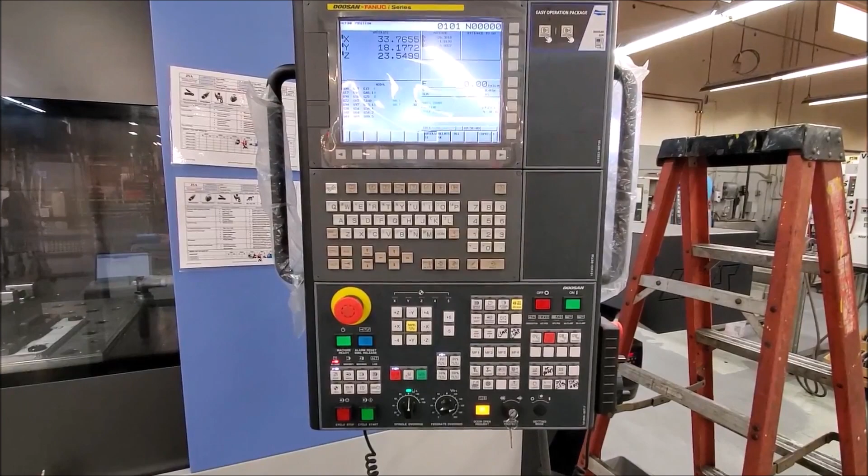We'll just get into the details here. The first thing we want to do is figure out what the addresses are for these buttons and these lights, because we want to know what they're doing at all times. The way we're going to do that is by looking in the manual.

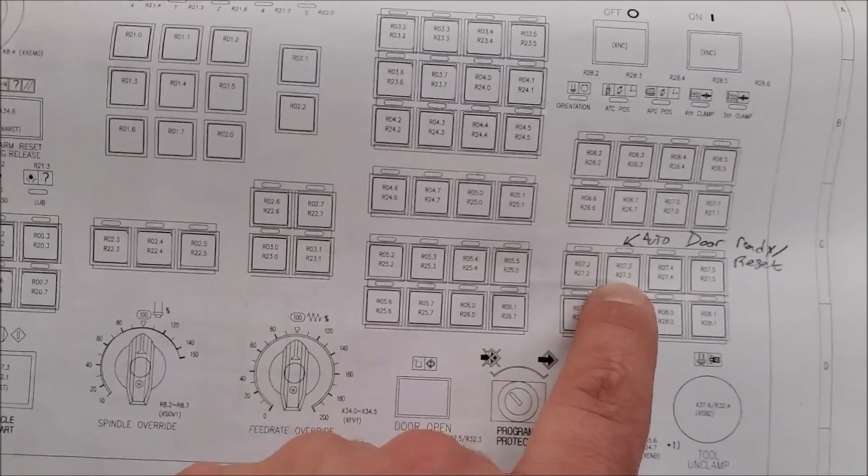What we're going to do is kind of trick the PMC into ignoring what they used to do and then giving them new functionality. And then these two, I believe, are blank, so these are going to be the clamp and unclamp, auto door reset, close and open door. In other machines we've also used this one, which was mapped to something else, but we took that map away and just dealt with it that way.

So in a moment I will show you how to do that.

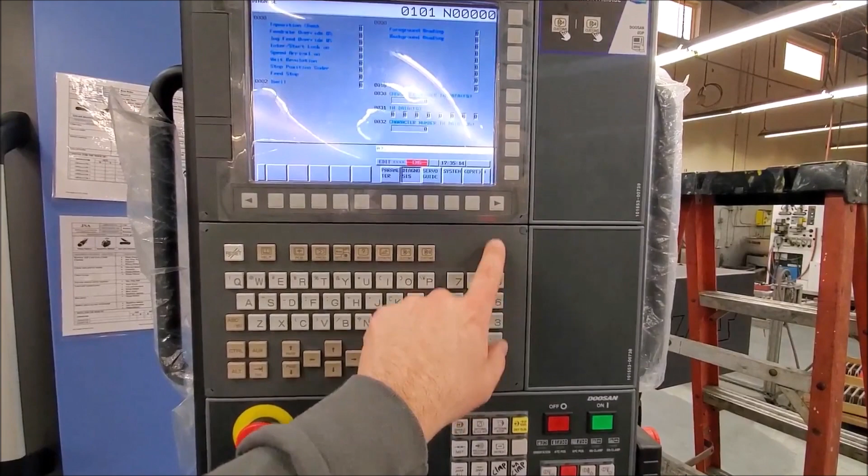The way that you program this is you have to enable the PLC or PMC editing. You start with e-stop, make sure you're still on edit. I'm not sure that matters, but that's what I do. Then you hit system, and I'm gonna go until it says something else. Then you find where it says PMC config. I'm gonna get real close to this so you can see it.

Then you come to this screen and you have to arrow down and then right key over, and you turn this to edit enable. Yes. You come down here and you say programmer enable. Yes. And this kicks the PMC into an editable mode.

Then you can hit system again, hit over a few times, then you go into the ladder. The first thing we're going to do is pick the address for one of these and see if it's being used. I'll show you how to do that.

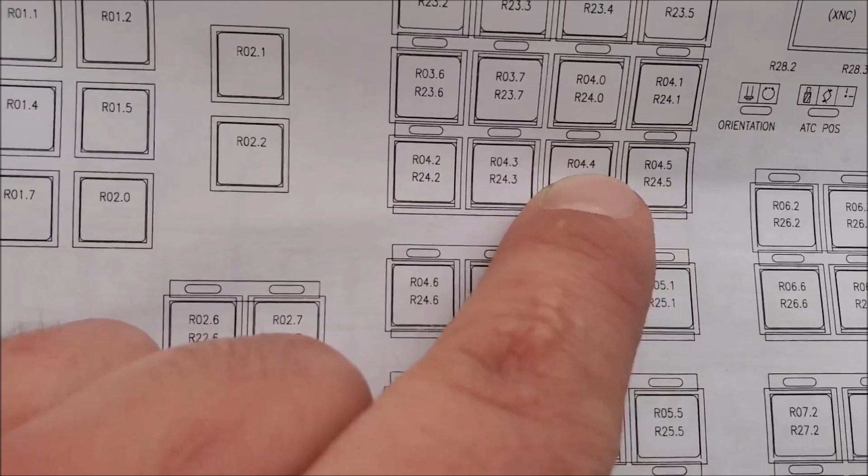R4.4 is the actual switch, R24 is the light. We could be wrong, we'll find out in a moment. But I'm going to look for R4.4.

Alright, so we need to get back to the ladder, so you hit system and over key until you see this PMC ladder. Then we need to search for R4.4, so hit there, and then I hit search menu. We're going to do this a handful of times. Say R4.4, search, and voila, it's right there.

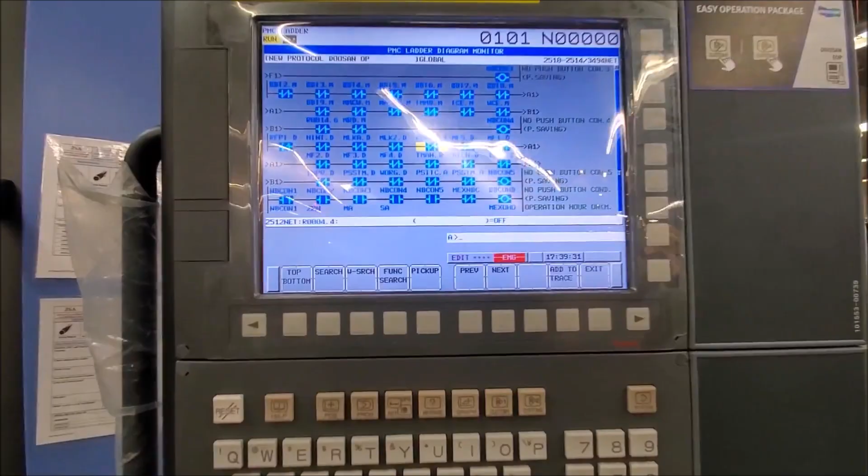So if you hit this button, you'll see that bit turn on and off. So normally you would never hit this button, so what we're going to do is just remove it completely. It's not even addressed, like it doesn't have a name, no one cares about it.

So the way I'm going to do that is I'm going to say exit, so we're going to exit out of this search function. Then I'm going to say edit, and then that's a problem.

So we have a problem. It's asking for a password to be able to write into the PMC, so we can't edit it. We need to get the password.

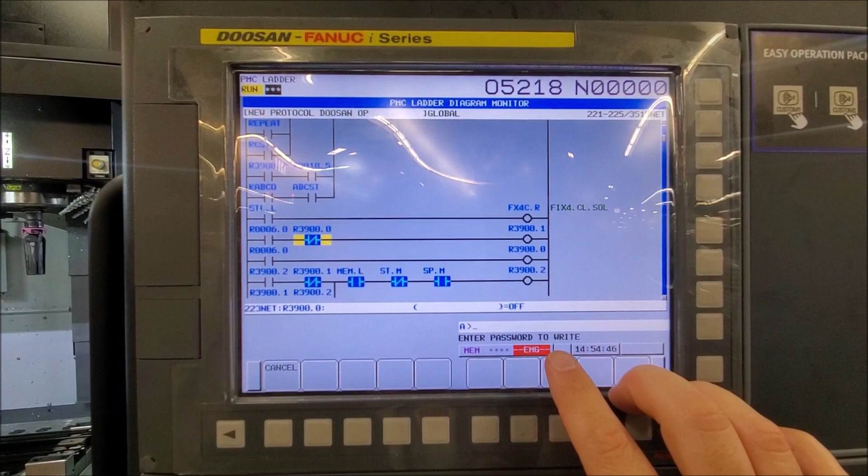There's two ways to do that. You can ask your distributor for the password, and if they're really awesome, they'll give it to you. Sometimes they won't, but most of the time I would guess that they will. Now, obviously, for obvious reasons, it may be protected for your own good. If you go in and screw the ladder up, then you could break your mill, or it could malfunction in some way that's dangerous, which neither of those things are good. But this video will help you understand what can be changed, and hopefully give you a little piece of good judgment about how to do it.

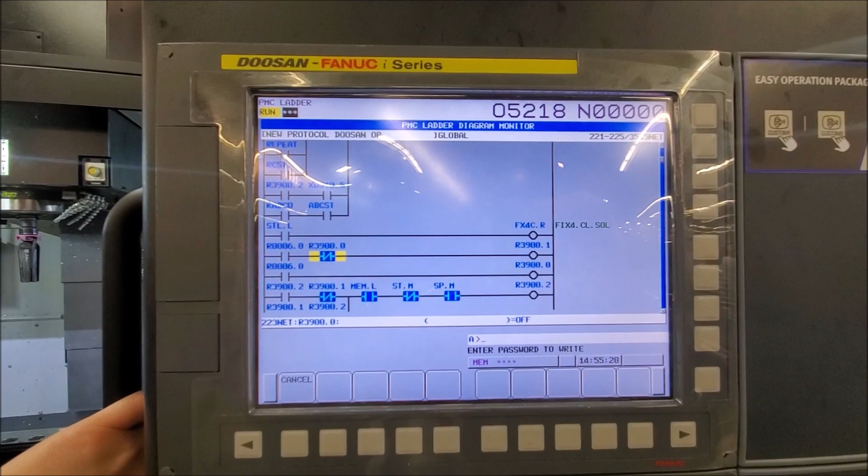The second way to crack the password is to use Google. I Googled something like Fanuc PMC password help, and it brought me to a variety of forums. In those forums there were guys that offered their email addresses and said, hey, if you need a password, just send me the ladder and I'll send it to you. That's what I did, and I got the password, big shout out to those guys for doing that for me. I also asked my dealer, and he gave it to me as well. So both ways worked, but either way should work for you guys. There's lots of good folks out there that help me out.

Anyway, the password for this machine is 1976. You go in there, and then you have the ability to edit. So now we move on to our next step.

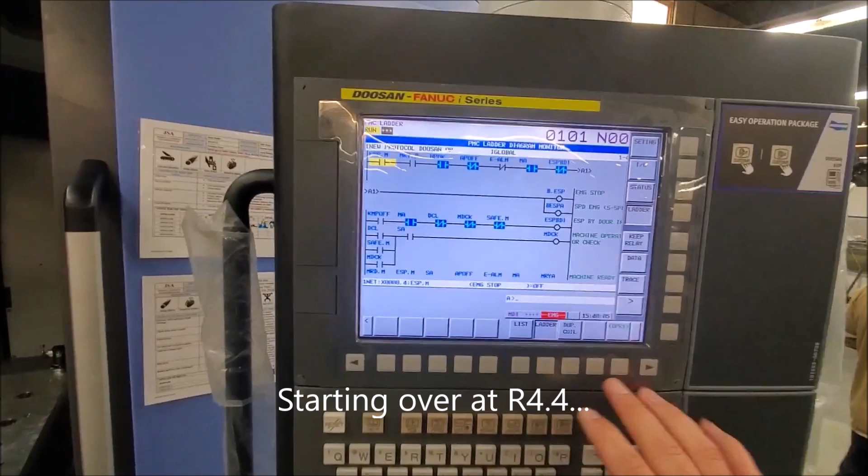Now we're going to search by hitting operator, search menu. We're going to say R4.4, and we're searching, and it found it here. So I'm gonna make this go away. This is a power savings conditional button. So if I press this clamp button right here, you'll see that bit toggle.

In a normal day, that really doesn't do anything for anyone ever. So what we're gonna do is just delete that from that bit of ladder. The way you do that is you're gonna exit, search, edit the ladder. It's asking for a password. The password for ours is 1976. Weirdly, this is the first mill that we've had that has a password.

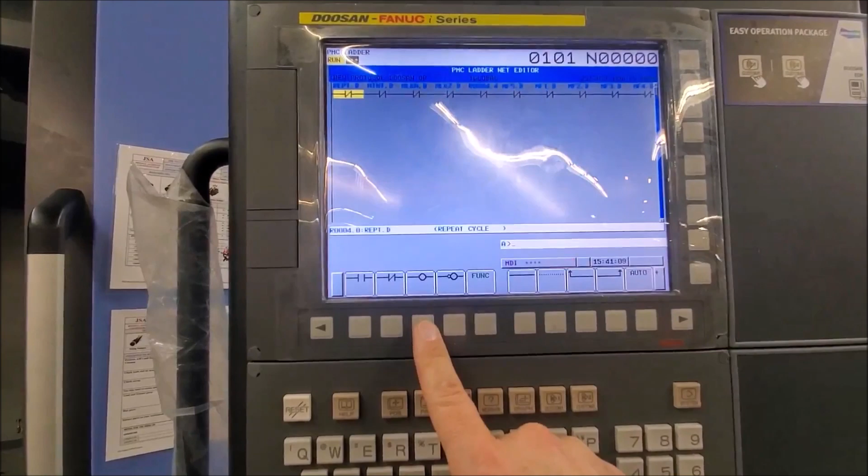Now we go to zoom, so we're going to zoom into this particular rung. And we go to R4.4, and we're just going to add a straight line, which is effectively a delete. So you just hit it, and now R4.4 disappears. Now we're going to exit the zoom, and there you have it.

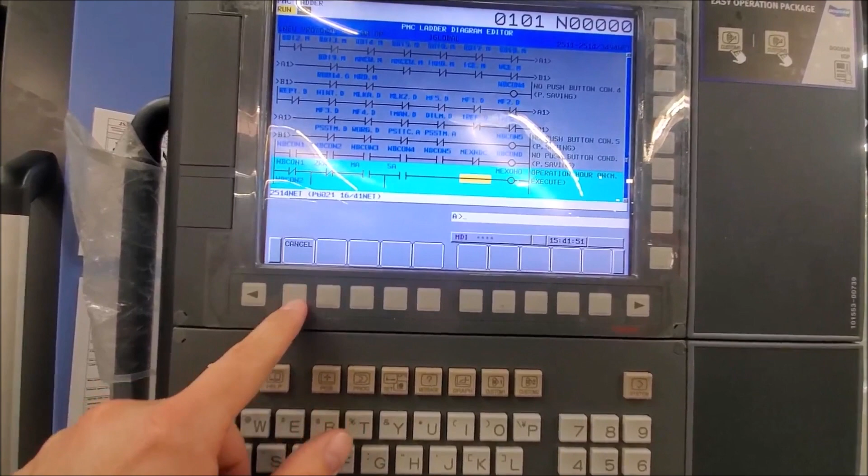So now there was another R4.4, I think it was down here somewhere. We're going to exit the edit, which will restart the ladder, because right now the ladder is paused or stopped. The PMC is running, well, excuse me, the ladder was probably running in the background, but we were editing a copy of it. So it asks, do you want to update the program? You say yes. It thinks for a bit. You want to write it in the flash? You say yes. On the Doosan mills, you don't have to go into another menu to write it back into the memory. This seems to do it by itself.

All right, so we're going to do another search. We're going to say search menu, and search one more time for R4.4. Searching. Address is not found. That means we effectively deleted this button from the list.

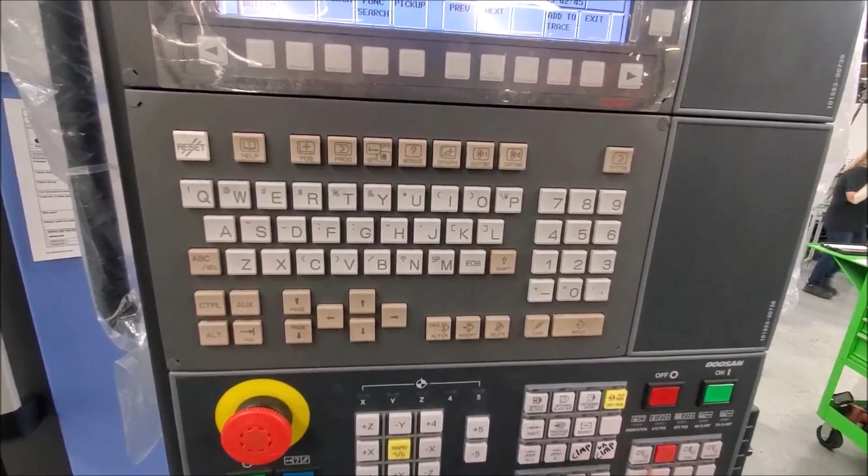Okay, now we're going to start making the logic that creates this clamp toggle on, toggle off, and then if you hit unclamp, it toggles off clamp and toggles on unclamp. Does that make sense? Probably not yet, but we'll get there.

All right, our next step is this. We have our Doosan electrical circuit diagram here, and thumbing through, they've got a whole inputs and outputs map here, just pages and pages of the stuff. We know that there's a circuit board with a bunch of open inputs and outputs. It's called XT107. In the manual, they're calling it CB107 for some reason, but same difference. So what you can see here, X's are inputs, Y's are outputs. So input, input, output, output, and then these are the different bits of that particular output word or byte, or however that works.

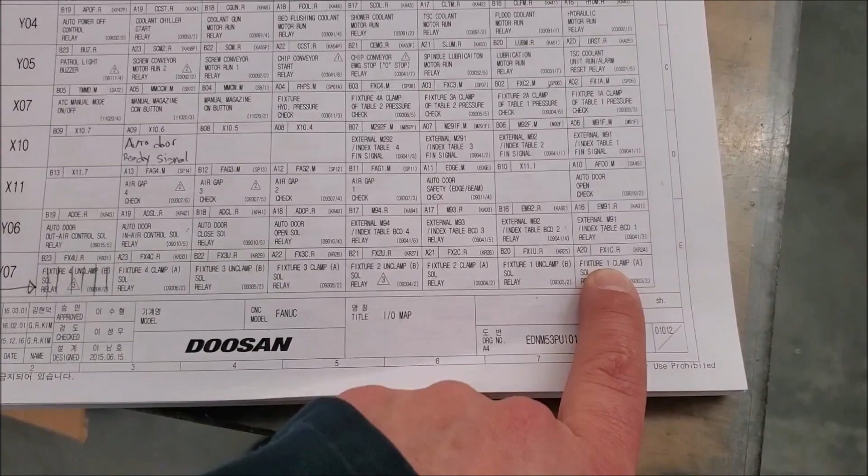Then, so we can see here, fixture 1 clamp is here in output Y07.0. That'd be 0.1, 0.2, 3, so on and so forth. So we need to make this button tie into this output of fixture 1 clamp and fixture 1 unclamp.

So what we do is the following. Come back to the mill and we have to search for that output. So we're looking for Y7.0. I'm just going to hit search and I'm going to say Y7.0. And then I hit search. And voila, it's right there.

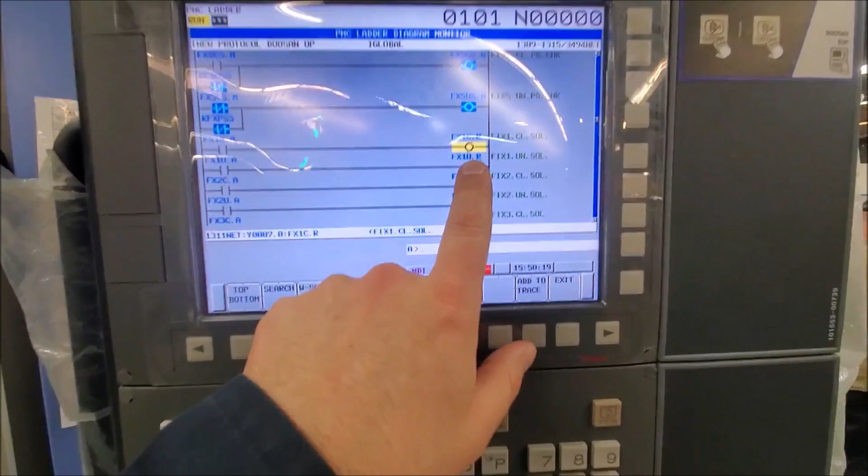Naturally, all outputs should only have one, so there's only one of them. So we have right here, we have this bit, and you can figure out what this bit is doing, but it has a bit of logic behind it. But this is just a bit that tells that output to come on.

And this is triggered by the M code. So what we want to do is we want to add ladder around it that also triggers with the M code, and we're also going to incorporate a door close signal, so you can't have somebody accidentally clamp it while their hands are in the tooling or anything like that. And then we'll also make it so that it toggles, and I'll get into that in just one second.

All right, so now we're going to create a new net or a new rung. Fanuc calls them nets instead of rungs. Most people would probably know them as rungs.

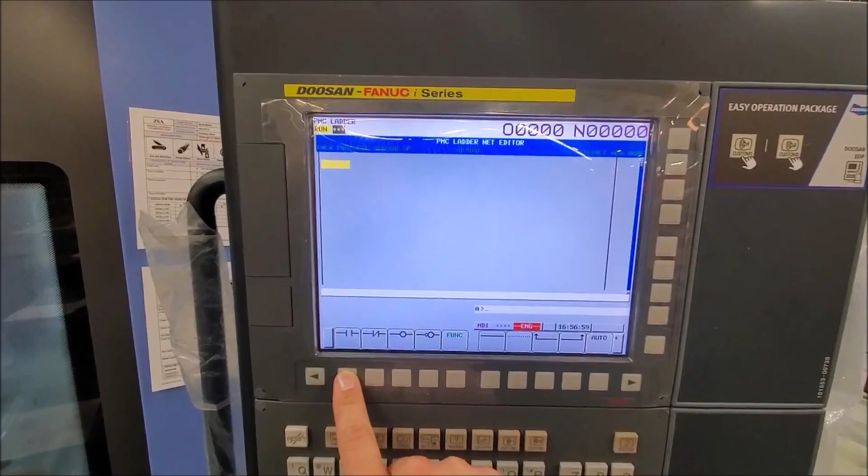All right, so we got the contact, an output. I'm going to key over to this new point, and if I just put in the output, it adds all the lines in between. So what we want to start with is this button address here, which is R4.4, I believe. Come over here, and then we need to pick a register to use, or a variable.

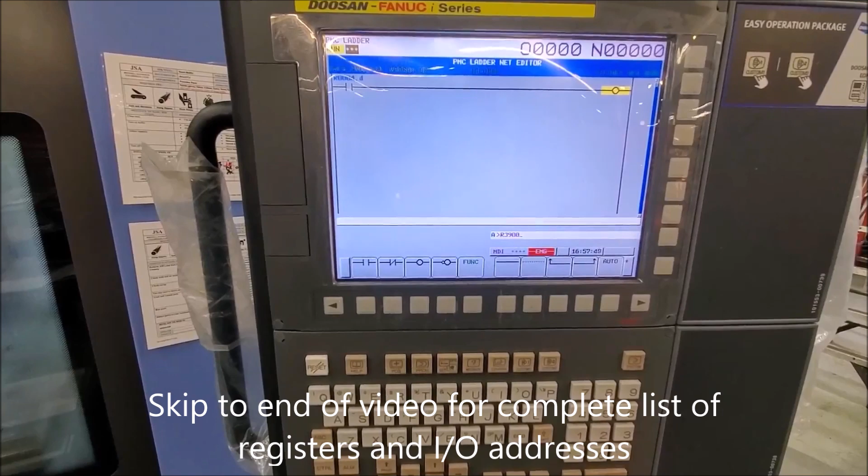So this isn't that complicated. We're going to use a few tools to cheat about which one to use. Because I've done this a couple of times, I know which ones are open, but I'll show you how to find them. So we're just going to key in R3900 and 1. That's where we're going to start, and then I'm going to say auto. And it's going to choose R3901.0, which is the first available bit in that register.

And then, because I'm really anal, I'm going to make this the exact same register as is what's in our other mills. And it's going to be R3901.1. So that updates it. And then I'm just going to exit this add, which inputs it here. Voila, we just created a new rung.

How cool is that? Now, what I want to show you is you have the ability to look at an address map. So this shows you all of these addresses of these registers, and it shows you which ones are available. So we didn't use 0, we skipped to 1, and then nothing else in this whole neighborhood is used. And we're going to use a handful of them for our own items.

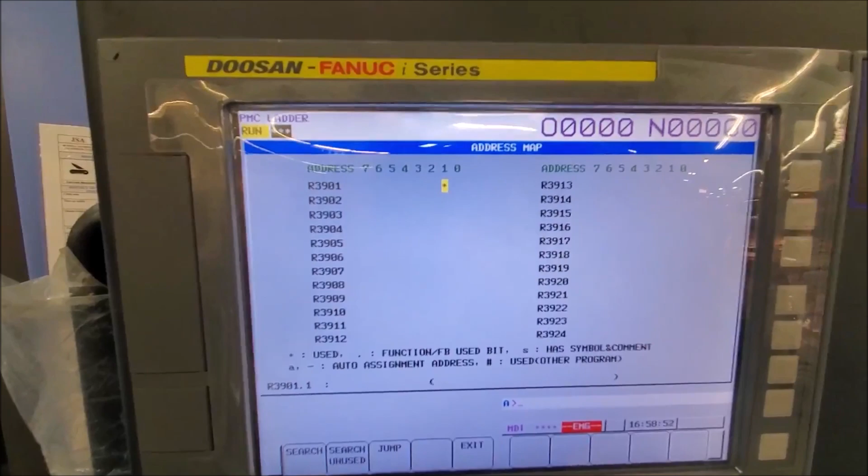Alright, to continue what we started, I'm going to cruise over here and I'm going to create another net. And this one is going to start again with contact. Oops. And then we're going to make a normally closed contact, and then we're going to have an output.

So the first contact is going to be our button again, R4.4. Just keying that in, hitting input. And then this one's going to be R3900.1. Oh, whoops. 3901.1.

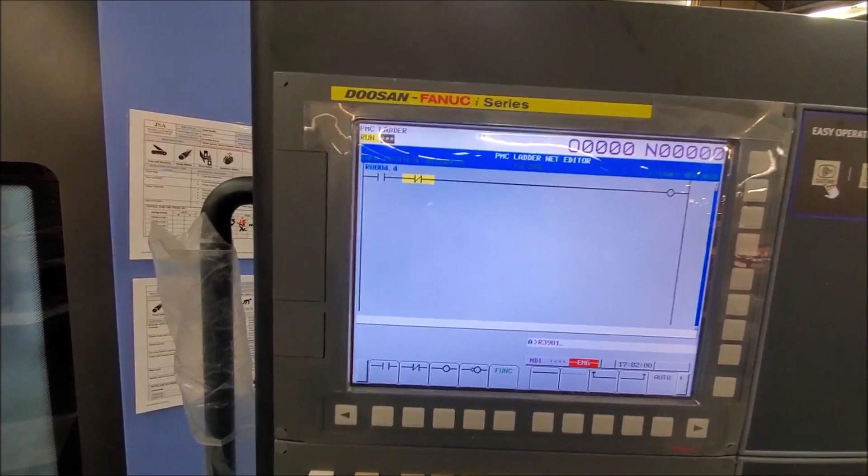Then this one's going to be R3901.2. And there we go. So we've got R4.4, R3901.1, and R3901.2. I'm going to input that. It's going to say exit the add.

So the next step is we're going to add another net or rung right here. And then we're just going to create a framework. And the framework's going to look like this, and you'll just understand why once it's all done. It's not entirely intuitive until you really give it some thought.

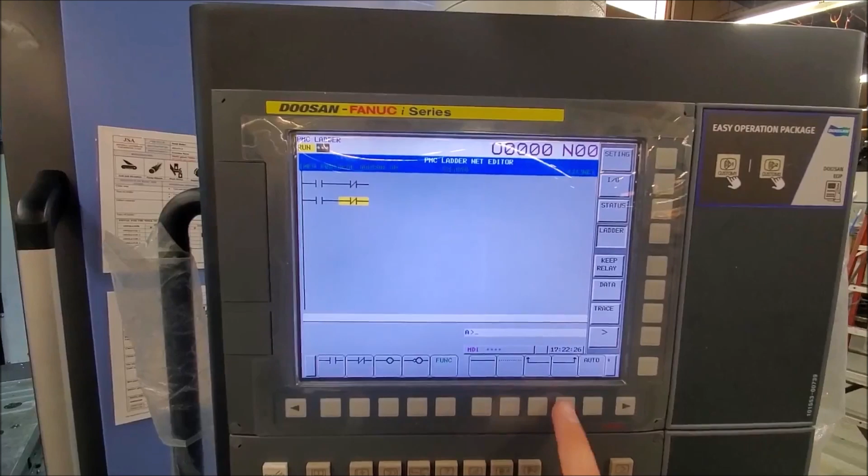So I just keyed around. Can't see where my fingers are going, but I just keyed around and using the arrow keys, I got to these different four points. And then I'm going to create a connection up here. And then over here I'm going to create another normally closed contact. And then I'm going to come over here and create an output.

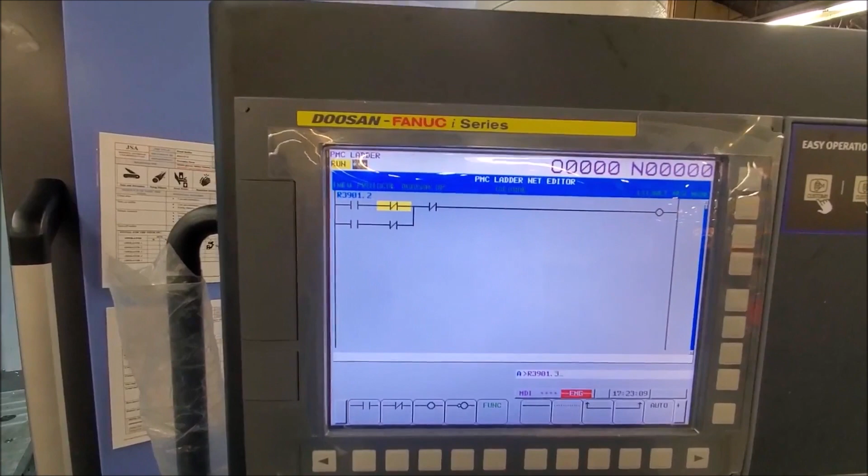Alright, so now we got to give all these items names. So this first one's going to be R3901.2. This next one's going to be R3901.3. This one's going to be R3901.3 again.

This is going to be R3901.2. These are flip-flopped and crisscrossed. And then looking forward, we need to involve the unclamp signal, which is going to be R3901.5.

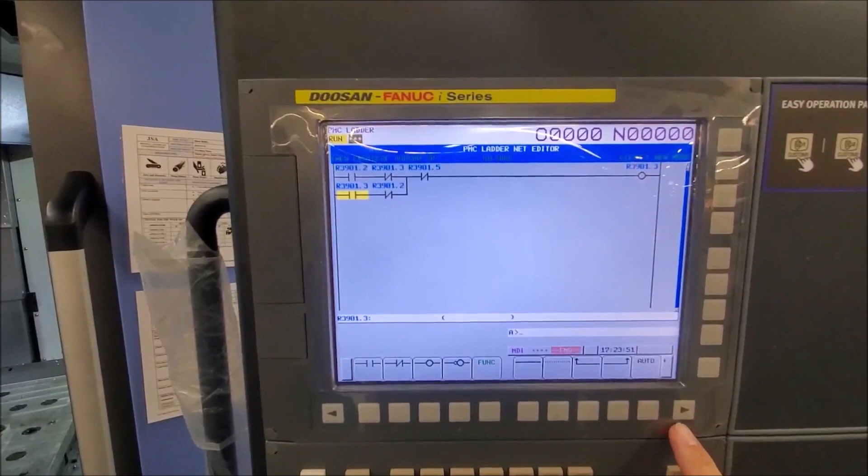And then out here is going to be R3901.3. So what you'll see is this bit will latch on and latch off with a button press here. So let's have a look at that. I'm going to get out of this edition and look over my work real quick to make sure I didn't screw this up.

Exit. It says, hey, PMC still running, you want to update? You say yes, and then you want to write it in flash ROM. If you don't, when you restart the mill, it will lose all your work. Then I'm just going to pull out the e-stop.

Turn it on. Ooh, actually that was unnecessary, but that's alright. And then when I hit this button here, let's see if I can show all of it. Toggles on, toggles off, toggles on, toggles off, and that's how that works. So now we have a toggling bit, which is what we wanted. We'll keep going.

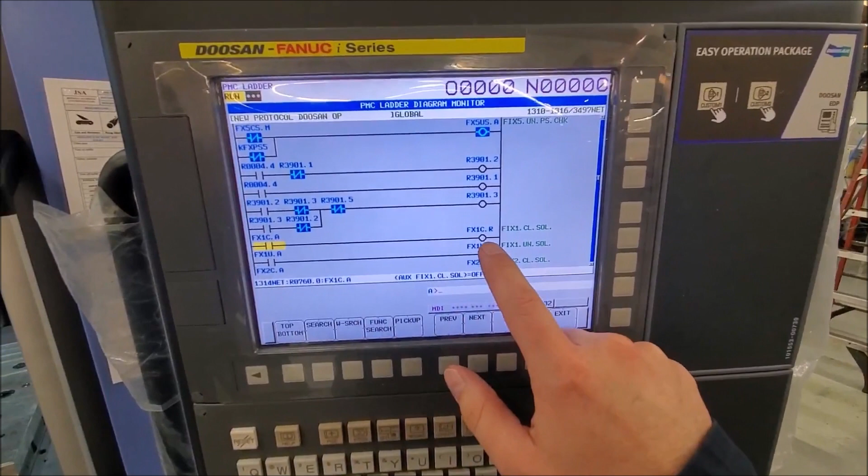Alright, so now we're going to edit this rung right here. To do so, we need to change our settings back. So, because I did that test, I pulled the e-stop out, we're going to push the e-stop in, and that allows us to move these back.

So, second one down is yes, bottom one is yes. Go back to the ladder. So we're right here. We want to edit the ladder. I'm going to zoom into this rung. I'm going to add our new contact, and for now we'll tie it directly up to the output line here.

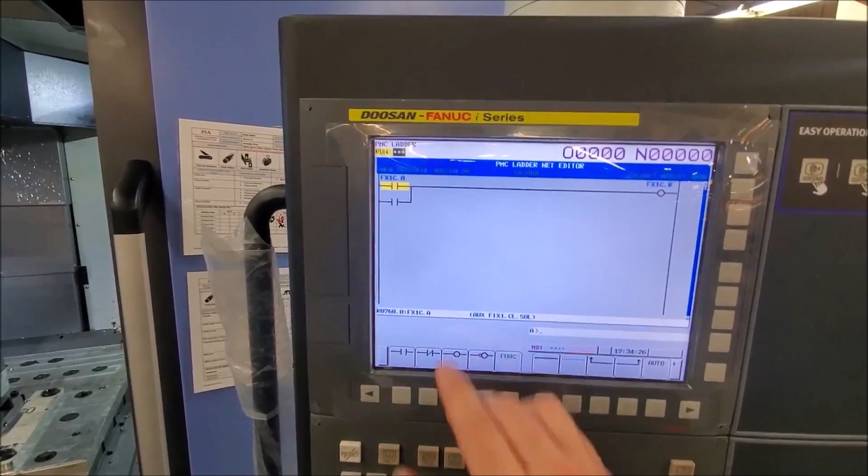This is, here, let me hide this. This is the actual output, so this is a Y address, 7.0. So this is tied to a contact on the back of the mill. This is just an auxiliary setup. And then this right here, we're going to say this is R3901.3, which is our toggling bit. Every time we hit the button, it toggles. And voila, there we go.

So now the output will toggle with this. So now I've got the mill turned back on. Just going to test it to make sure everything's working right. I'm going to turn this on, boom, like that. Then you can see right here, lights on, valves on, doing what it's supposed to. That's clamp.

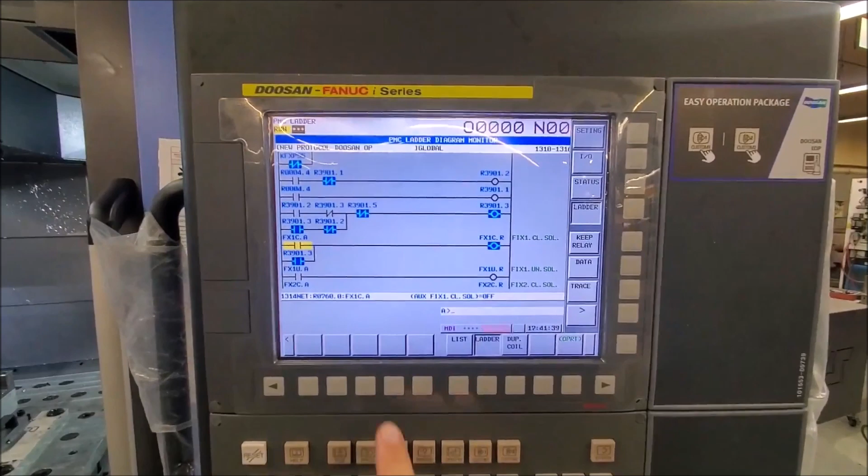Now we want to make a light come on every time that solenoid is on. So that address is R24.4. Here we go. So to do that, we're going to add another rung right here. So I'm going to edit it. We'll create a net. It always creates a net right above where you're currently at as far as the cursor goes. Then we're going to create an output here, or sorry, a contact. Scroll over once.

Output. This one's going to be R24.4. That's the address to the light. And then this one was Y7.0. Could be wrong, we're going to find out here in one second. But that's one clamp. Alright, so now every time that clamp signal is on, this light right here will turn on. How cool is that? I know you guys are excited.

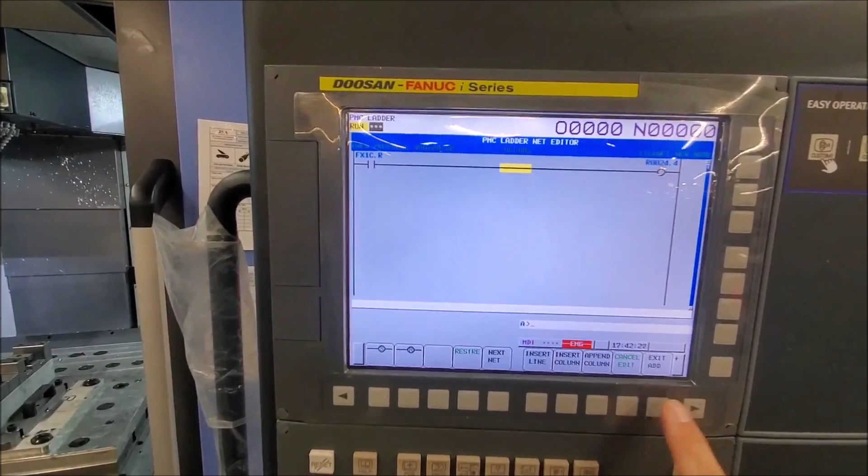Exit the ad. Exit the edit. Hey, it says, do you want to update the program? You say yes, write it in flash. So now, clamp is on, light is on, on, boom. That's how it's done, son. Now we're going to set up the next button with that light.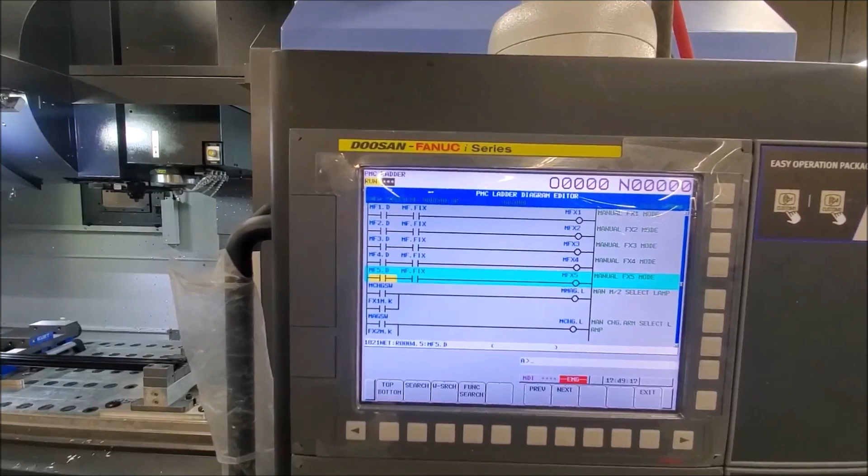And you can just watch me do it. Alright, so now we're going to search for the next register that is the unclamp button. So search for R4.5, which is the address. Finds it here, and then we're going to exit the search command.

We're going to zoom into this particular rung. Then we're going to do this cool thing that is insert a column. So it's going to insert a column here, and I'm going to make an input that's normally closed after an input that's normally open of the same address, which basically makes it an always false input, or an AFI is what Allen Bradley calls it. And then you just say R4.5. Oops, two R's in there, try that again. Boom, so that's always false. This is always false, we're not changing anything.

Exit the zoom. And just for kicks and giggles, I'm going to make sure that there aren't any R4.5s hiding. There's the two we made. Oh look, there's another one, that's push button savings, something we don't care about. So look, let's go in, zoom, we'll find that bit, R4.5, and then we're just going to straight line it across. Exit the zoom, exit the edit. Oh, no, hold on, went too far. I didn't mean to exit the edit.

Go back into editing, search menu, R4.5. We're going to make one last search. So that one we knew about, that's what we edited. That's all there is. Alright, so now we've taken out all of the 4.5s.

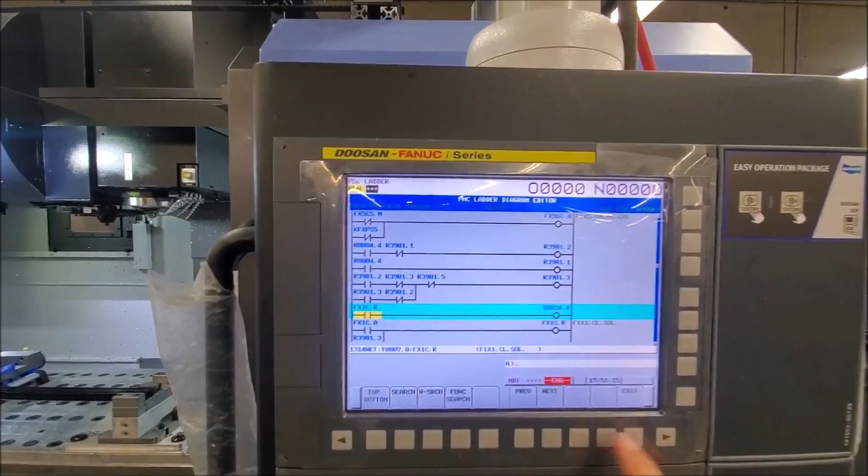I'm going to say R3901.4 here. Oh no, that's wrong. Just kidding. R3901.4 here is the output, and then this is going to be R4.5 as the input.

This name that's calling itself now, we'll change that in a minute. I have a video about how to do that, much better than what I could probably explain today on the spot, so I'll probably just post a little tag right here. You guys can click on and learn more about it.

So now we add another net, a rung, and let's see, I forget how this is structured. It's one of these, oops, one of these, I think, and that.

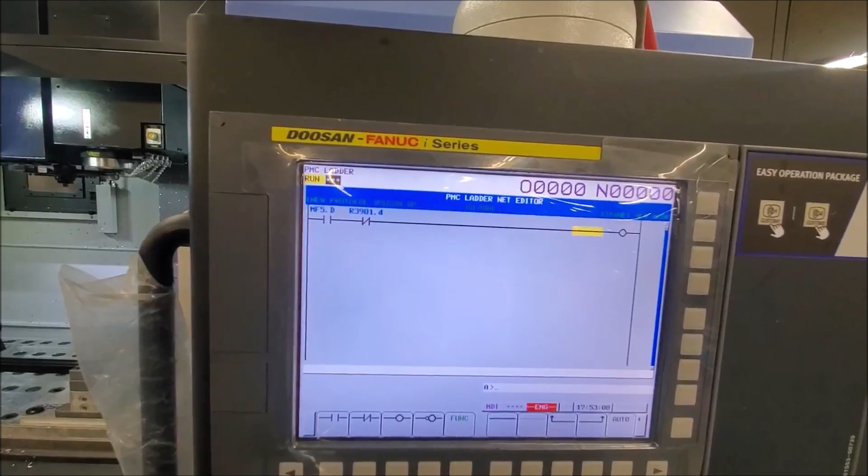Alright, so this one is R4.5, R3901.4. This one's R3901.5.

Now we're going to create a new rung right here, and we're going to create this logic structure. It's kind of crisscrossy.

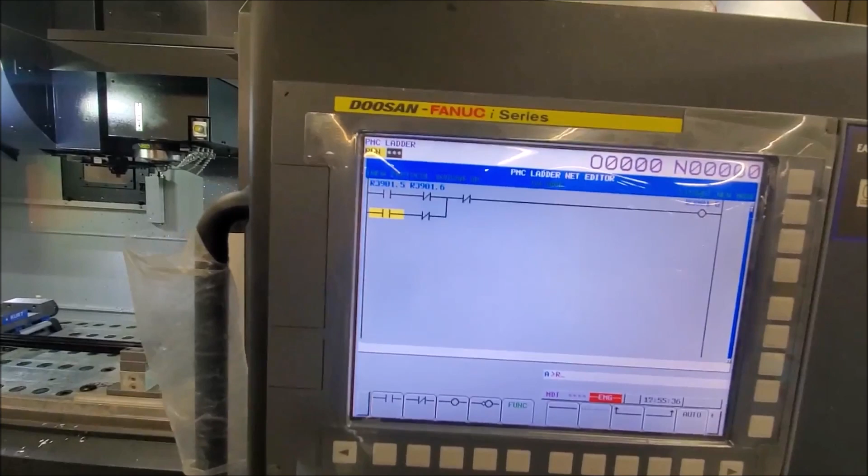R3901.5, and this will be R3901.2. And there you have it. So now we have our 3901.6 is the toggling bit. Exit that, add.

So now we have this is our original switch, so that's our input from our switch. It goes through here, it'll toggle now. Let's test it. Alright, so now if I hit our unclamp button, it toggles. There you have it.

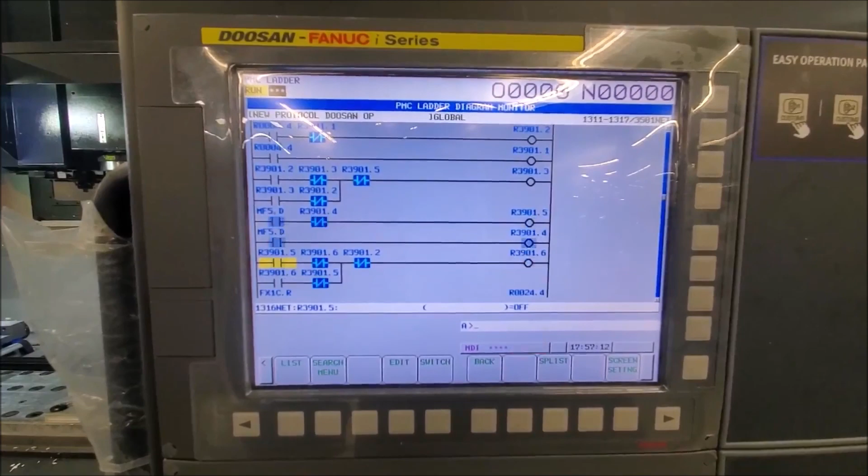So now we're going to edit this fixture 1 unclamp solenoid line. Edit this, zoom into this, and we're going to create a new bit here, and bring that up. This is R3901.6, which is our toggling unclamp bit, and there you have it.

Exit that zoom, and then just prior to this, I'm going to create a new net. It is normally open to a contact out. This contact out is...

R24 point something. Hang tight, let me look. 24.5.

Alright, so we're going to make this button be auto door open. That button is auto door close. This button will be auto door reset, and that light will tell us if the auto door is ready.

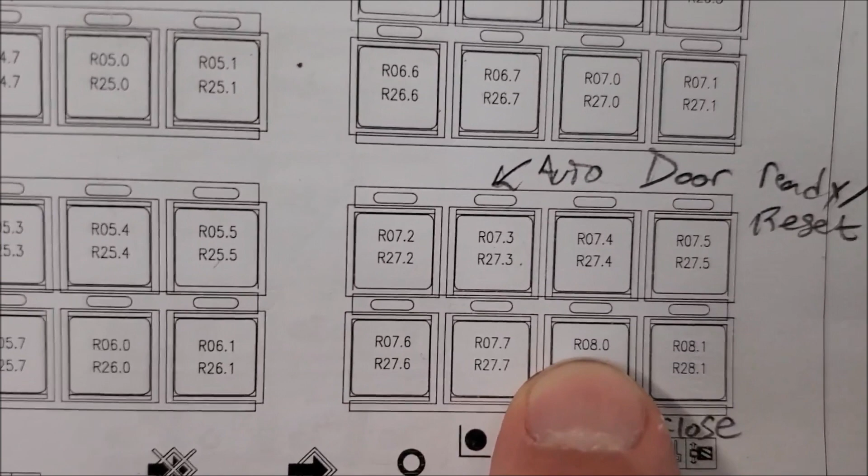So the address that we're looking for is R8.0. We'll start with the open switch, and we'll go from there. All right, so as before, we're going to search for R8.0.

Go. So now they're all negated. Now we can use the button for what we like.

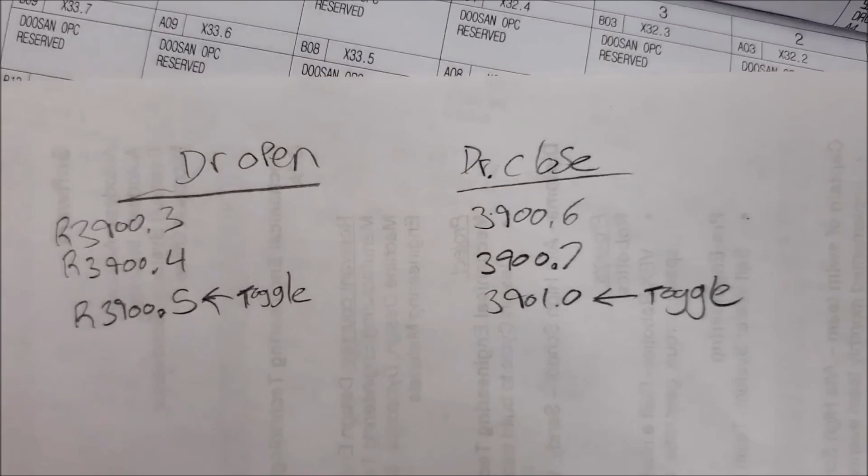Here's a quick note to talk about what bits we're going to use for the door open toggle and the door close toggle. So we're going to use R3900 3 through 5, and then R3900 6, 7, and 3901 0.

And I'm doing this, it's not really important which registers you use. I used these before on another machine, and I want to kind of copy what I did before so that all the troubleshooting is the same across all the mills. So that's why I'm doing it this way. You could choose other values, whatever.

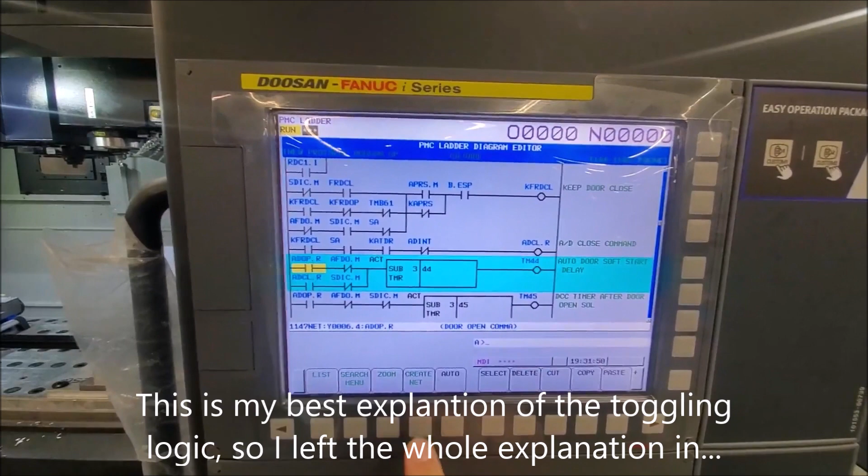Okay, so now we're going to create the toggle switch. We're going to start by creating a net, and we're going to start with the first rung, which is normally open, normally closed, output. And then we're going to cruise down here and say another rung.

Looks like that. And then we're going to create a structure for that last one, which is normally open, normally closed, normally open, normally closed. A little connection there, and then we got a normally closed, and then the output.

Alright, so the switch goes here and here. So R8.0 goes there. Don't worry about the name, we can fix the name later, I'll do that in a minute, because that name doesn't mean anything to us.

And then the first of your bits goes here, so this will be R3900.3. The second of your bits goes here, R3900.4. That's already done.

R3900.3, so bit number 1 goes there. And then these flip-flop, so first goes, this one is the second, and then that one is the third, and that's the third, and that's the second. So second, second, third, third.

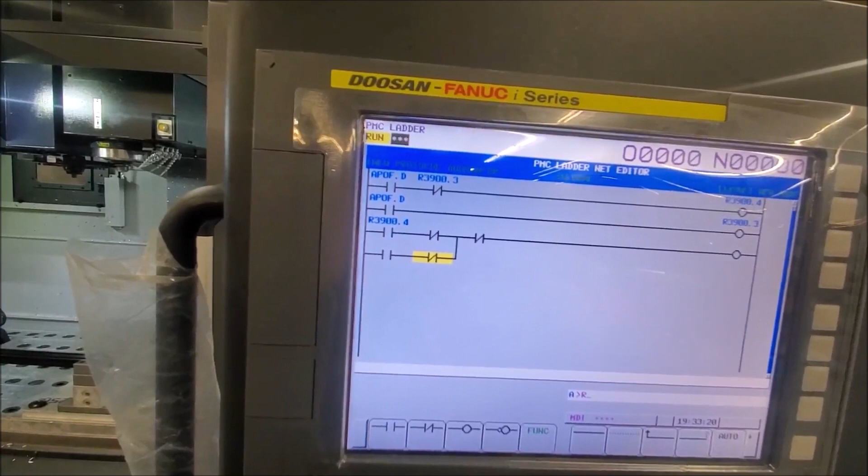R3900.4 goes there and there, R3900.4. And then we do the third, which is actually bit number 5, R3900.5, R3900.5. And then this one gets a little tricky.

You look right here. We want to tie that to the door closed, meaning if you hit door closed while it is door opening, that shuts door open off. So we're going to choose bit number 7. So this is 3900.7, R3900.7, and then all of this goes to R3900.5.

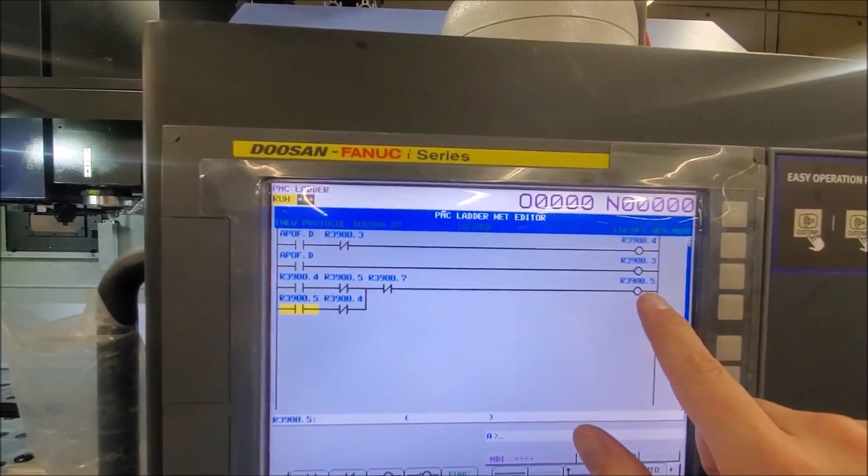Okay, now I'm going to do the same thing for the door open command as I do the door close command. And that'll happen right about now. Now we've got 2 toggling bits. This one's for open door, that one's for closed door. So if I hit these little buttons, door open, door close.

Oh, by the way, I have these laser engraved. There's a guy near us that has a laser engraver. It makes it look just like these. It looks really sharp, and it costs like $5 a piece or something. He doesn't charge very much for it.

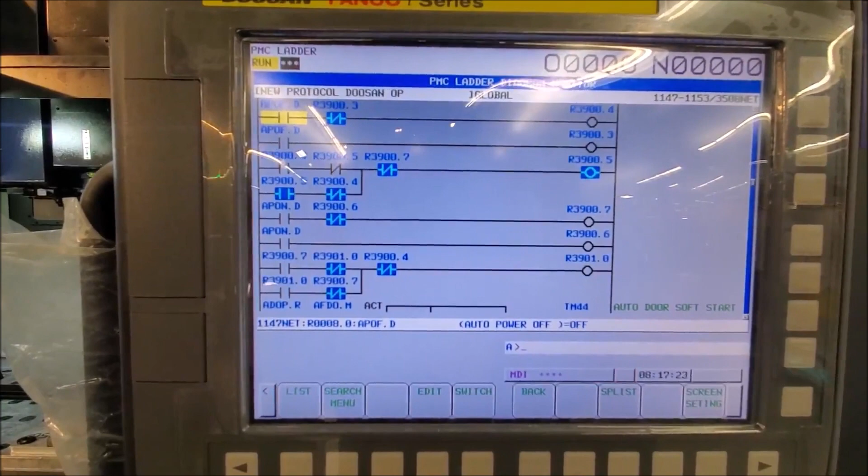But if I toggle these, that's close, open, close, open, close, open, close. And then you can toggle close off all by itself. So now we've got to figure out where in the ladder we're supposed to add this stuff. I usually add new things next to what they do.

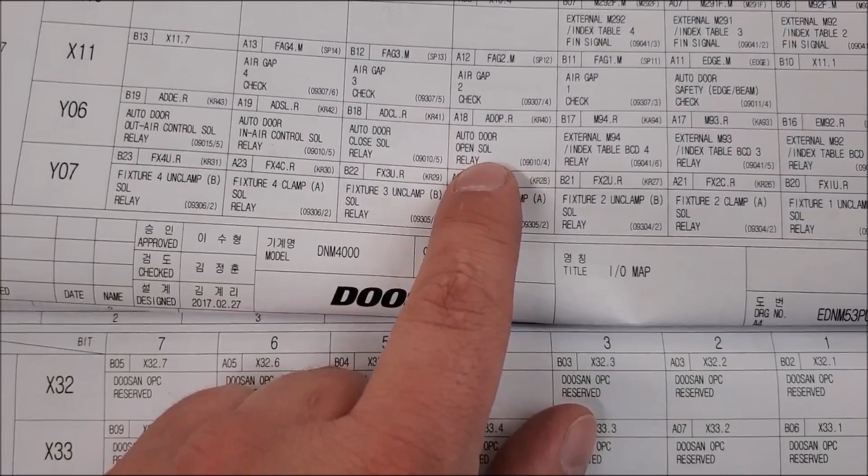So you put auto door stuff with auto door stuff, and fixture clamping stuff with fixture clamping stuff. So we can see here we've got a variety of auto doors. So we've got an auto door close, auto door open, solenoid relay. So these are Y6, 5, and 4. So we are starting with the open signal, which is Y6.4. So we're just going to search in the PMC to find Y6.4.

Again, we've done this before, Y6.4. Search. Voila, here we are. Alright, so let's find a good spot. So I'm going to scroll around. There's a door open command. That's not quite it. We're looking for something with M52 in it. Oh, there it is. So M52's here.

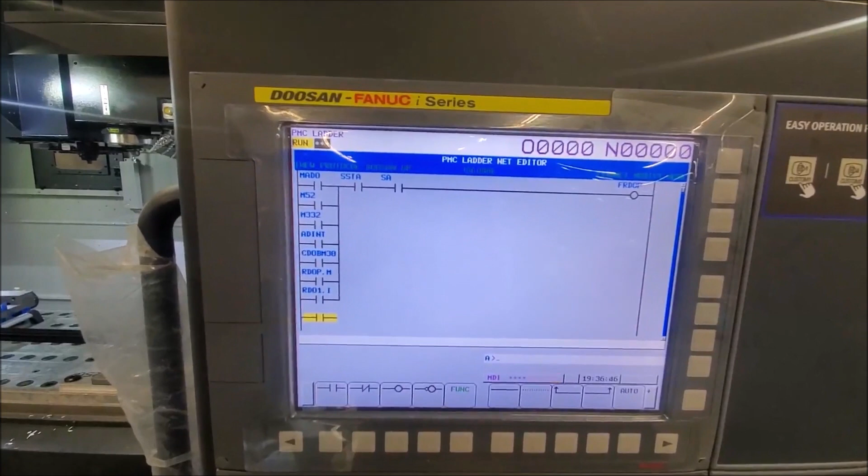What we want to do is edit this particular rung. And we're going to say R3900.5 goes there, and then we'll tie this back up. So what this is going to do is either you can open the door with an M52, or you can open the door with an R3900.5, and that signals this FRDOP, which isn't the actual output, it's just part of the process, which is nice because it prevents you from doing something stupid like try to open the door when it's still locked, or while you're in the middle of a cycle, which can't happen. But, anyway, it makes it smart.

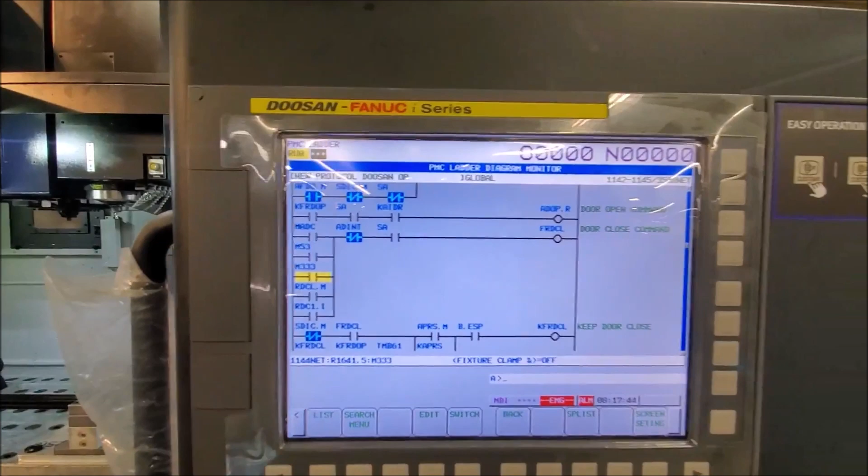So now we've got to figure out what to do with this toggling close bit, that closed door bit. So we can come up here, just above this is M53, which is the signal that the mill will send in your G-code to close the door by itself. But we don't want to use that because this FRDCL is here. So when the mill is on, all this stuff lights up, so it'll connect across. But this goes through, lights this KFRDCL up, which is also here, which latches itself on.

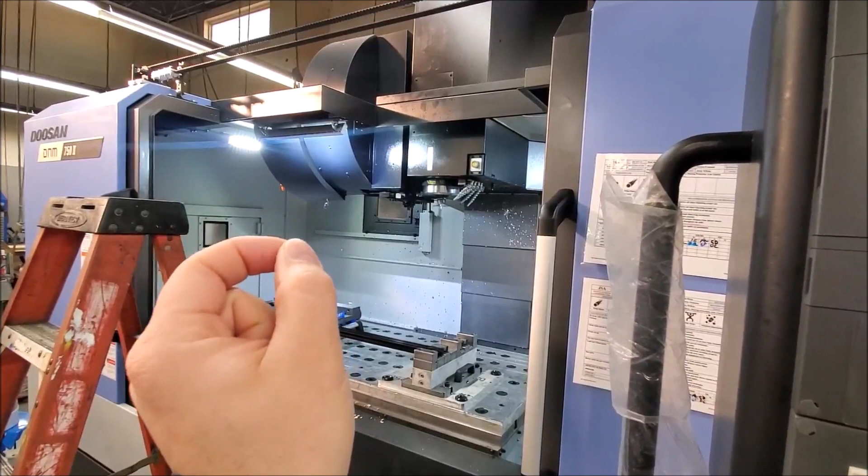So the problem I have with that is that I want this auto door to close with your finger held on the button, and it closes while your finger's there, and then when it's all the way closed, then you can let go of your finger. And the reason for that is it keeps your finger captive and keeps you out of the door. It's another level of safety.

So in order to do that, we go down to this next line, which is the rung that actually has the actual output. So you can see this is Y6.5. So that's the actual output on the back of the machine. What we're going to do is edit this particular rung, and I'll show you how that's done.

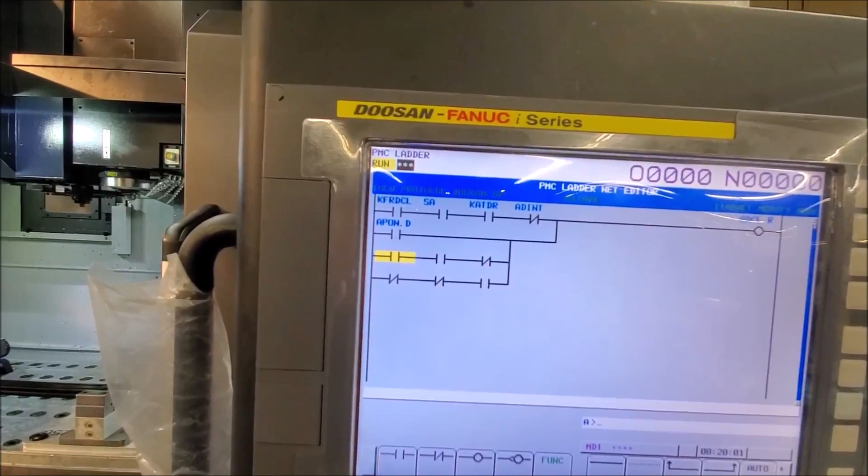We're going to start with just a general structure. This first one is going to be the button itself. So it will be this door close button, which is R8.1. This next one is going to be your door close toggle bit, which is R3901.0.

This next one's going to be what's called DCL, which is an input to the mill that says the door is locked. So once the door is locked, it gives that input. So you just type in DCL.

Then this last one is the toggle bit for the door close, which is R3900.5.

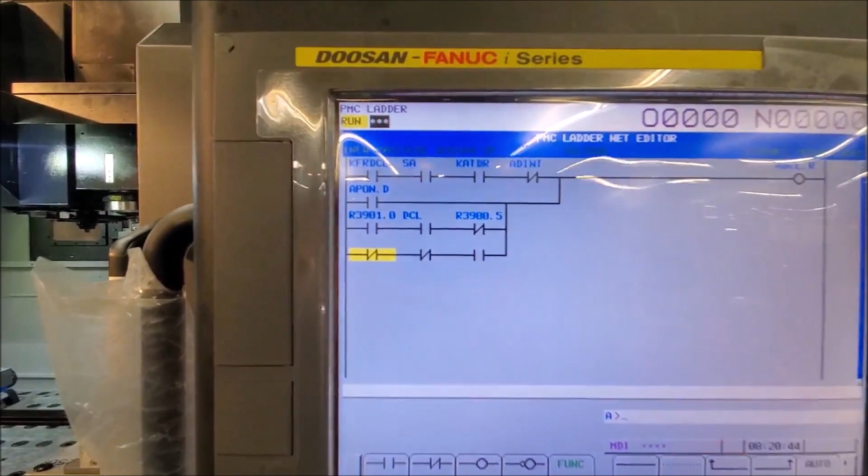And then down here, this one is the actual output to the open door signal, which is Y6.4. This next one is this same bit right here, which is R3900.5, and then this next one is DCL.

So there's probably a little more elegant way to write that, but that works. This is all flip-flopped, and I think you can combine these.

So what this does is it makes it so when we hit that button, it gives the output no matter what. So you're closing the door. If you let go of the button, the door opens back. Now, once the door is closed, this will all latch itself.

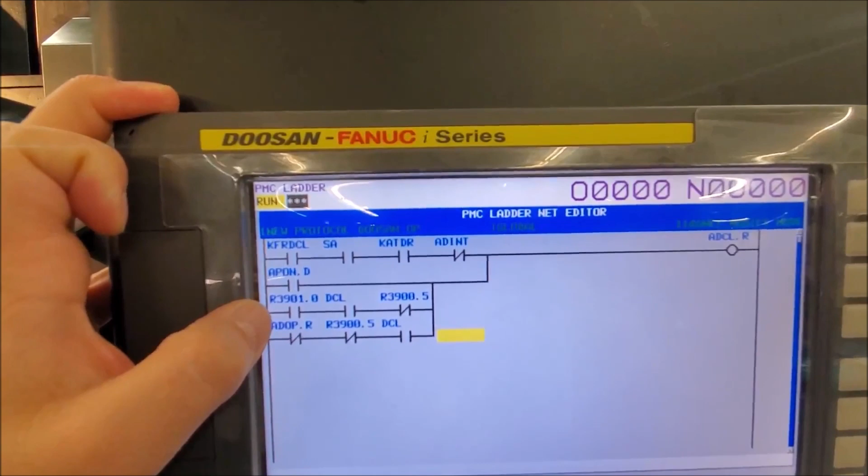Then, well, actually, this will latch itself too. So then, once that door is closed, this lights up. That's going to be false, which makes it pass through, and then that lights up.

Same sort of thing here, except the difference is when you hit the door open button, this should toggle off, and if it does, that means all of this is false, and that's false, which means your door is no longer trying to close itself. That's the point of all of this.

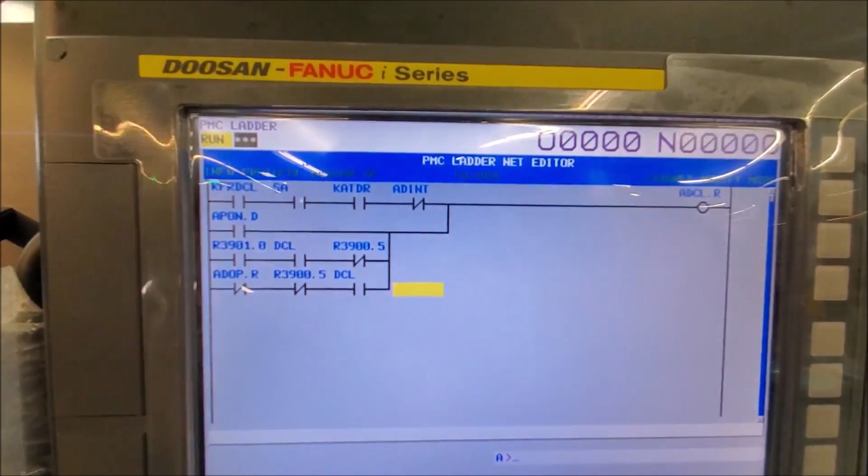I'm not absolutely sure that this is entirely necessary, but it works, so I don't really care to troubleshoot it any further. So then from here, we exit the Zoom, and then I wanted to talk with you about this keep relay.

So you can see that this is a keep select auto door, is what we're calling it. And you can see the address is a K address, 10.3.

So let's go find that. First, we have to exit the edit. It's going to say, hey, the PMC's running. Write that into Flash ROM.

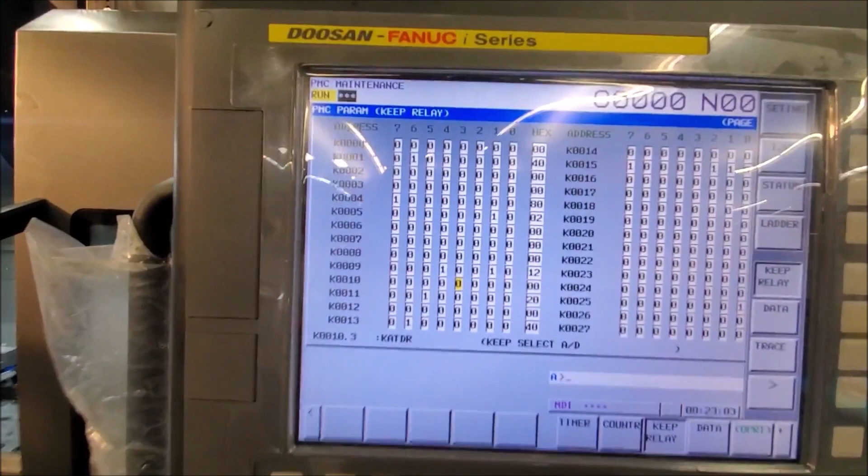Then you can just use this side menu, shortcut to your keep relay, and just so happens to be that I was in that line, but there's a bunch of keep relays. They're used to turn on and off functionality throughout the machine, but this particular one is this guy.

We're going to change it from a 0 to 1. You get two choices, it's either a 0 or 1. Most people watching this video is going to know that.

Now we go back to our ladder, and this is on. How cool is that? So now we have full functionality of the button.

The next thing we're going to do is tie in these little lights to the button outputs. So we're going to make it so that when the door is opening, it lights up this button, and when the door is actually closed, it lights up that button.

Alright, so these little addresses here, R28.0 and R28.1, are the addresses to those two little lights above the buttons.

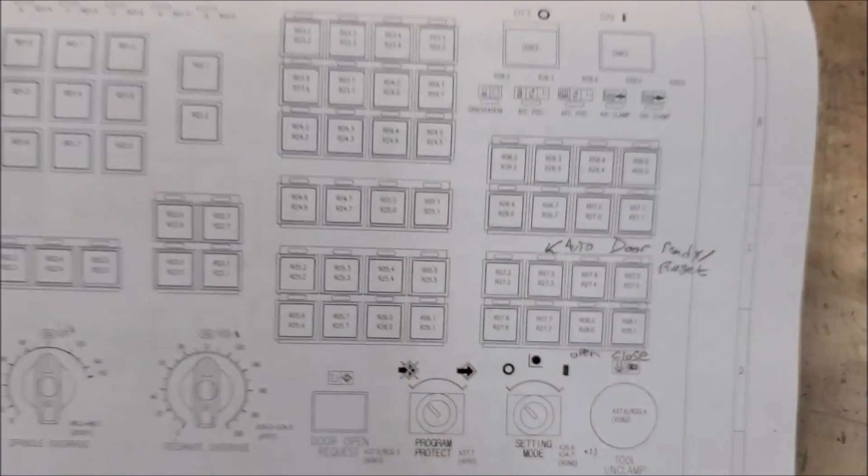Now we're going to map them here. We're going to start with editing, and then we're going to create a net. Go create it above the line above where you're at. We're going to start with 2, so start with the general structure. So that'll be the open light, and then this will be

closed light. So what did I call it? R28.0 and R28.1. Oh, you can't see that. Come on now, who's driving here?

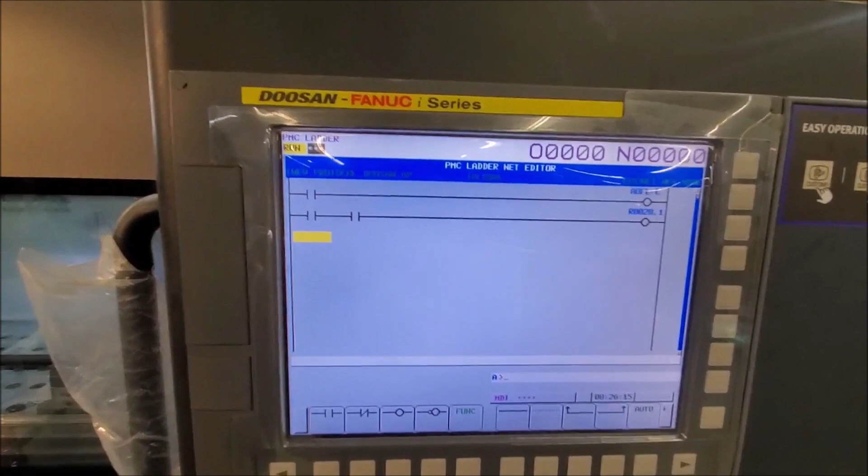So there you have it. That one had a name to it already, but that's R28.1. Then we're going to use the outputs. So this is

Y6.4, which is the actual output. And then this one's Y6.5. And then this one is DCL.

So what this says is that when we're actively trying to open the door, that's on. When we're actively trying to close the door and the door's closed, that light's on, which tells the operator, hey, the door's closed, you can let go of the button.

So the next thing we're going to do is make it so that this light right here tells us if the servo is ready or not. So if the servo's faulted, that light's out. Normally you want the light to be on all the time.

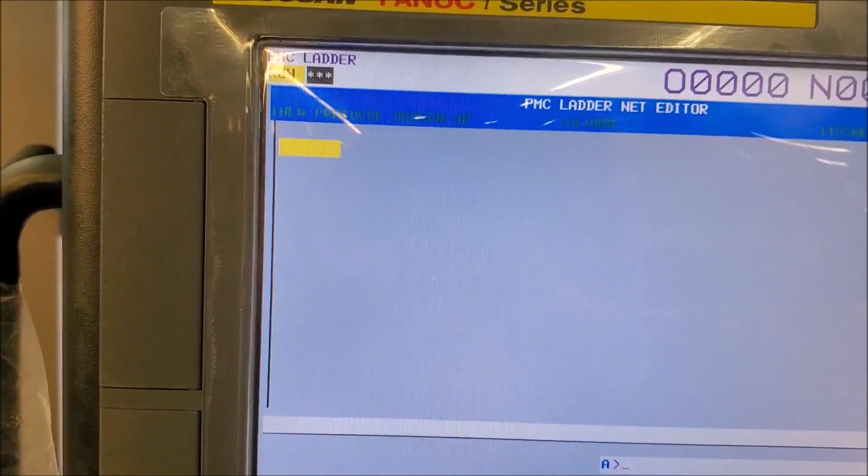Luckily, the servo has this little output we can use that we've tied into X10.6, and we're going to tie it out to R27.3.

Here we are, R27.3. Type in right. And there you have it. So there's that portion of it.

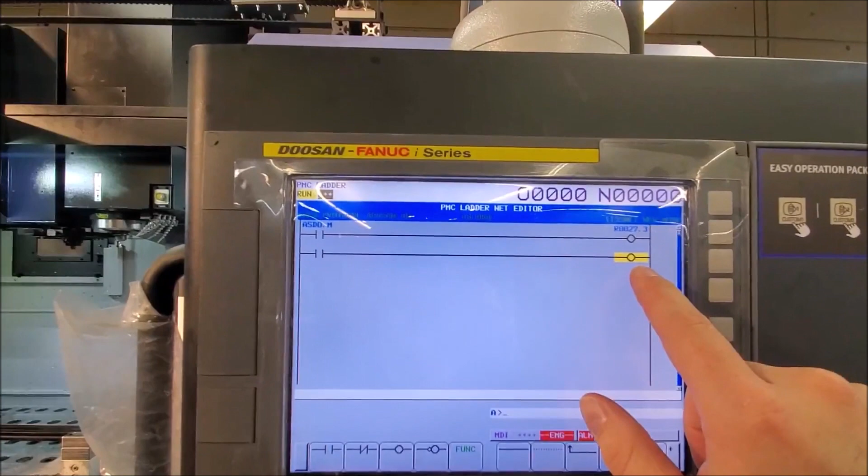The next step is we're going to create another rung that will look like this, and the output will be to the enable feature of the servo. The servo has an enable input that makes it so that it has to be on when the servo's running. So what we're going to do is tie this side to the button, which is R7.3, and this other side will go to an output that we're about to find. I'll show you in a sec.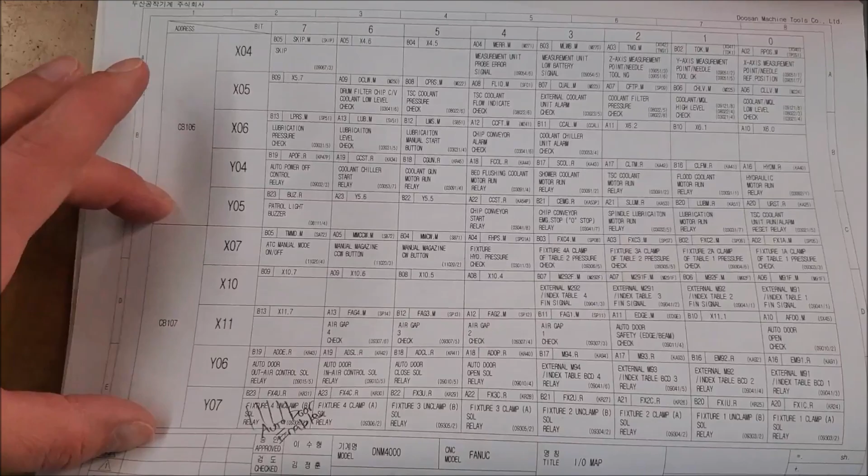Okay, so we're here at the I/O map. We have access to everything in this, and then we have a bunch of stuff that we're not going to use, like fixture 4 unclamp and clamp, fixture 3 clamp, fixture 2. We're using fixture 1. We may use fixture 2 one day, but fixture 4 is really unlikely that we'll use.

So we're going to remap this output, Y7.7. This is how we do that. For now, I'm just going to put in Y7.7 here, and it gives you an alarm because we haven't cleaned it up yet, but it's used already in rung 1334. It's kind of nice that it tells you that.

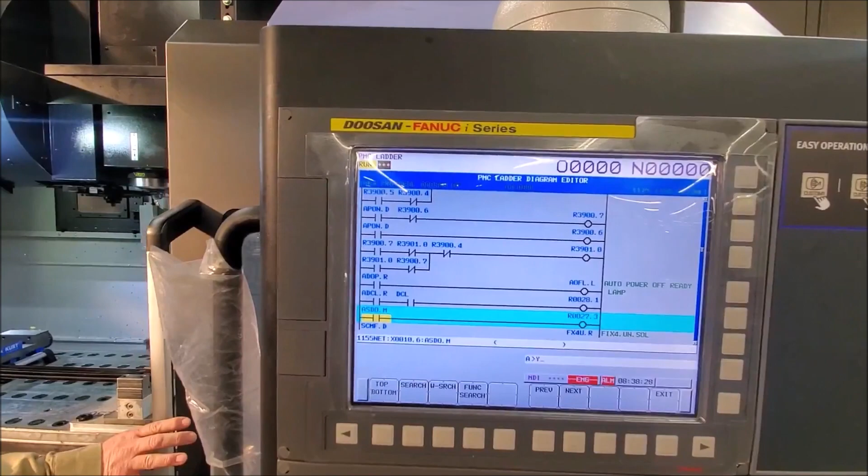So our next step is just to exit this, and then we're going to do a search for Y7.7. Alright, so there you have it.

The next step is to tie in our little robot. We've got to tie in a handful of signals into the controls so that they can talk to each other. Okay, a couple other notes.

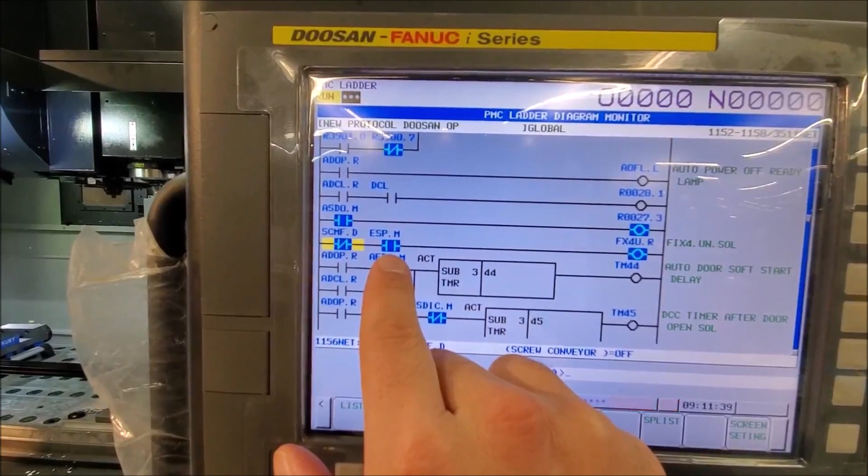On this line, this is the line that sends the enable signal to the servo, or the auto door. And so this is this button, and I had it programmed backwards. I wanted it to go low when you press the button, so I had the polarity or the type of contact wrong. And then we added an e-stop signal. So the e-stop has to be out in order for it to be enabled. So if you hit the e-stop, it unenables or disables the servo.

Okay, this next step is to make this robot give a cycle start command to the mill. The way we're going to do that is first we're going to search for the output of that button. So we're going to find the address of this, which is shown there. It's X37.3. Remember, X's are inputs.

So the first thing we're going to do is search for X37.3, and we'll just keep searching. What we're looking for is a cycle start setup. Working robot. Oh, look, there it is. Boom. So this is called auxiliary cycle start. I'm not sure why the main cycle start button is tied into something called auxiliary, but this bit right here, st.a, is what we're looking for.

So what I want to do is edit this rung. So we're going to edit, zoom, then we're going to add a line. Then we're going to add contact, and then another contact. So let's see.

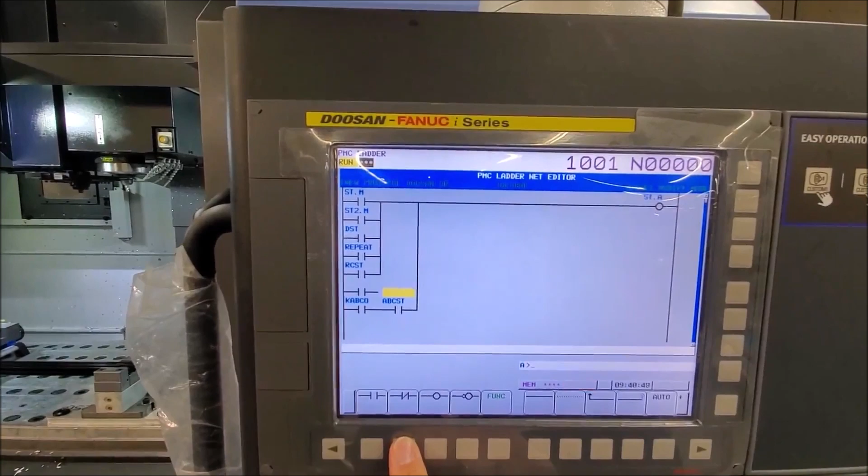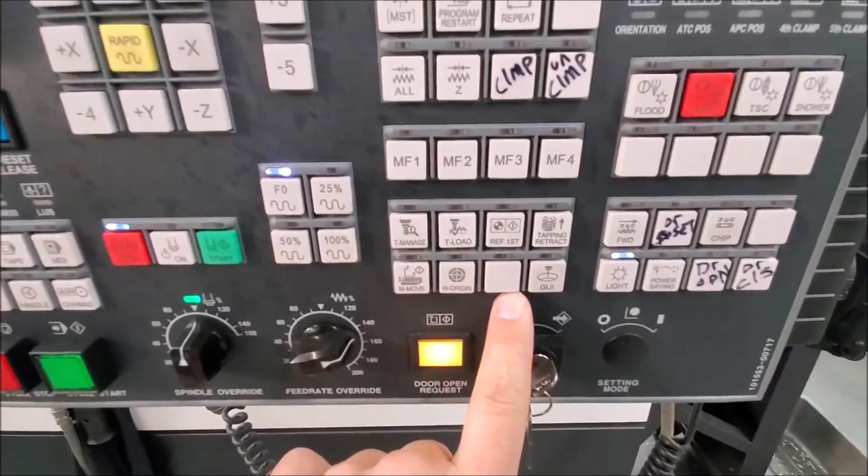But this bit right here will be a toggle bit that will be auto. Auto has to be enabled in order for this to function. Then the robot is allowed to cycle start, and we did that so that hopefully we don't get someone debugging the robot and accidentally starting the mill and causing a crash at the mill. So that's how that works.

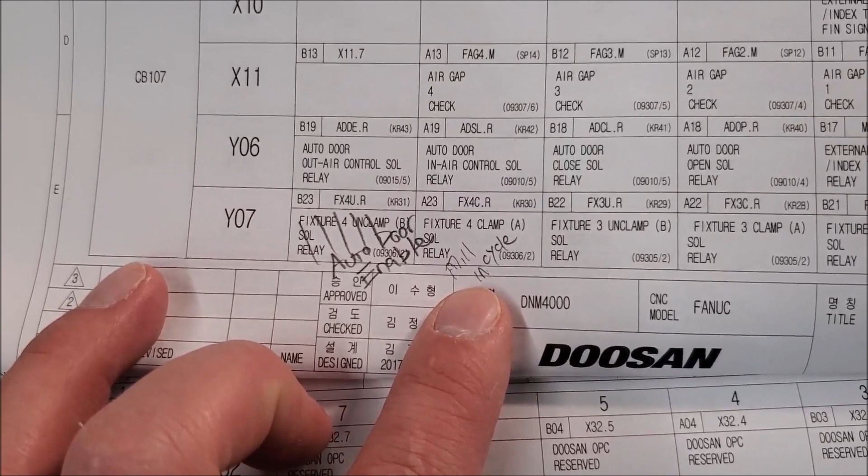Our next step is to create a signal to the robot. So this is an output from the mill to the robot that is called mill in cycle. Again, we're going to commandeer one of these outputs. This is Y7.6. So we're going to go find Y7.6 and delete all of this fixture 4 clamp stuff out of it. I won't show you that because you've already seen it, but it's the same process that we used for this one.

And then we're going to do another output that's based off of, not another output, but we're going to tie that particular output into that R32.1, which is the lamp or the light on this cycle start, meaning the mill is in cycle. So that's our way of telling if the mill is in cycle. It's real simple.

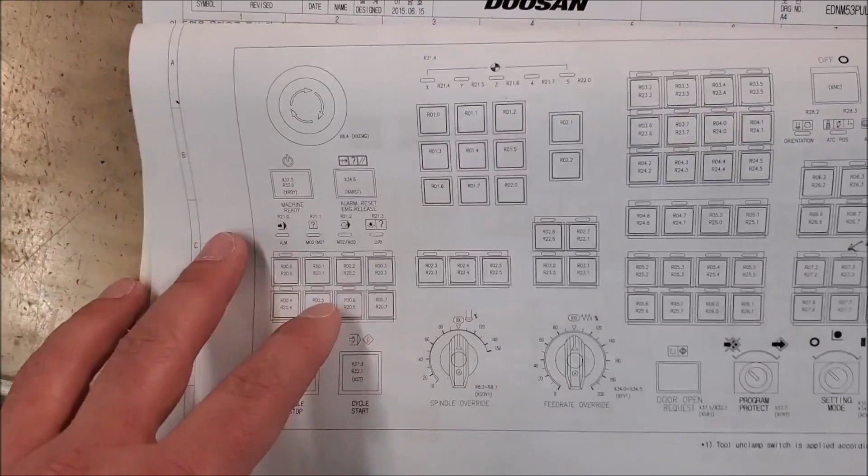It's also worth noting that the way Doosan made their ladder, and the way Fanuc does it, there's a really convenient M20 feature. M20 is a robot call, and then the robot gives an MFIN, basically saying you're loaded, and it just continues. So you put your program in a loop with an M20 to call the robot and load. That's really convenient, and would be a much smarter way to do what we're doing, but we have to do this same robot setup for a Haas and a Mazak. So we wanted to make the control system in the robot the same for every mill, and this is the way we're going to do it, even though on the Doosan or Fanuc controller it's kind of hokey.

Okay, I wanted to show you a couple more things. We're just doing some testing now. Doors are working, clamp is clamping. So let me show you how we got here. We had to change a couple more things.

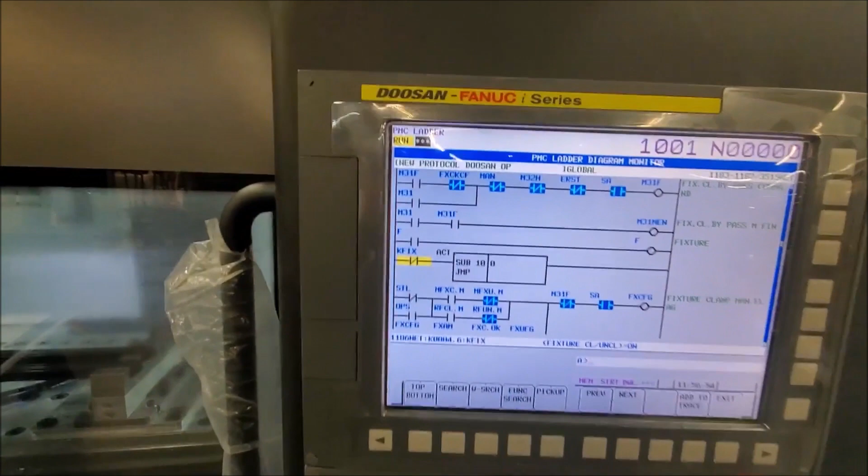The first one is this JMP function, a jump function, which ends with a JMPE way down below, like many rungs. What this is doing is all of the fixture clamping logic, and you can turn that logic on or off. You do that through this kfix variable, which is a keep relay, keep relay 4.6, and you change it just like we changed that other keep relay. That turns this to false, which means we don't jump.

And then I'll scroll through here. What we found was, if we have this keep relay on, this fixture 1 clamp keep, or this one on, fixture unclamp keep, what it would do is, it's a little hard to explain, but basically at the end of the cycle it would keep the solenoid clamped no matter what. And that's a bummer, because if you're wanting to troubleshoot something, you want to be able to unclamp the part on your own accord.

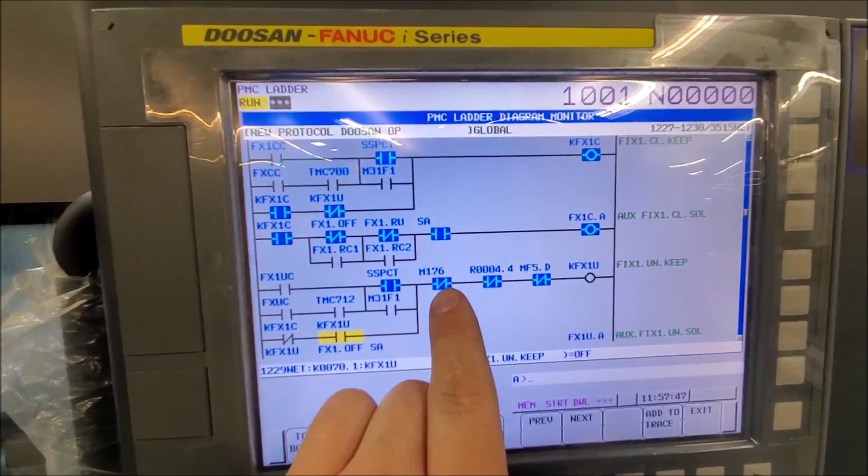So what I did was I added a series of logic, M176, which is the clamp, R4.4 and R4.5, you can see that here, R4.5, which is this button, or that button, or M176 is the clamp signal. What I did is I made it so that it let go of this signal right here. So once it's on, it latches itself on. That's the problem, right? So it will unlatch itself if you hit any of these buttons, or if you start the cycle over again. So that worked out great.

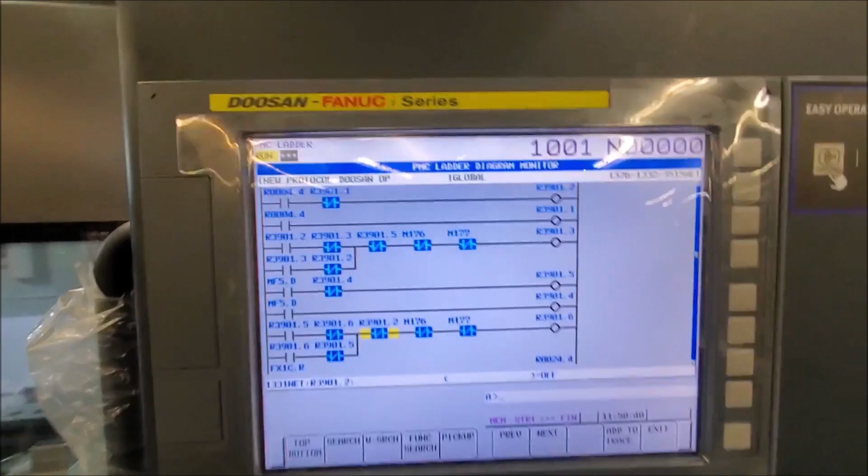And then the other thing I did was, let me search for R3901.5. Perfect. So this is our unclamp toggle, and this is our clamp toggle. I added 176 and 177 on both of these so that they're normally closed. So if they turn on, which we'll see in just a second, you'll see this flash, and then you'll see this flash. You didn't get to see that flash, I guess.

So what that does is, if you have this clamped already, like if you manually unclamped it to get your part out, it will release that button press and make it so you don't have two people trying to control an output. Because what you could have is it stuck on clamping, and then the mill says hey, I need you to clamp, but then you're clamping and unclamping at the same time, and you don't actually grab your part, and then tools break and stuff flies.

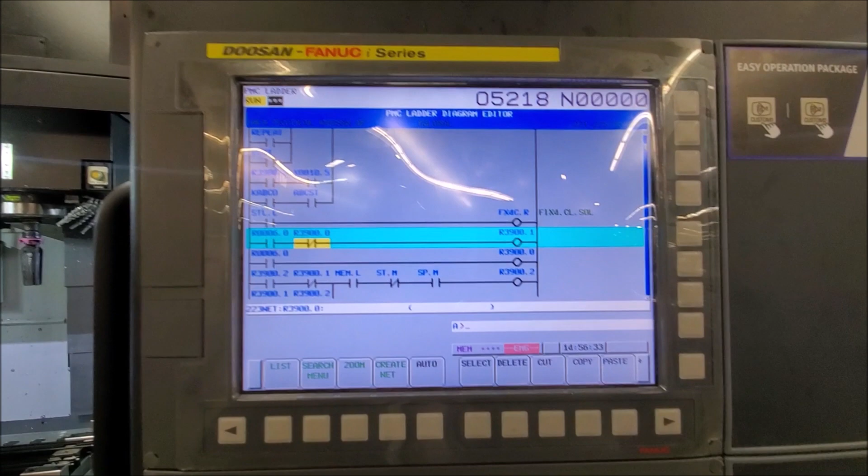It's bad news. So, one more note. Now that I'm mostly done editing the ladder, except for changing the names, I'm going to make a backup of this ladder. That way, if something goes wrong, I have this copy of it, and then once I change the names, when I get a little more time, I'll go in and make another backup and save that somewhere safe.

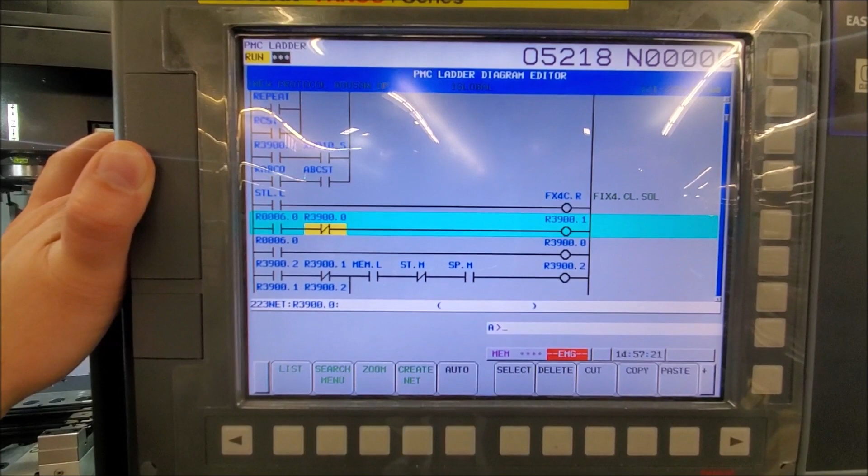Of course, I started with a backup. The very first thing before I did anything was create a backup, because if something goes south, you want a copy of what is on this machine. I've made the mistake of not doing that, and somehow ended up bricking the machine on a previous project, and it took me a minute to find a quality backup of what the mill used to be. And they're mill specific. You have two brand new mills on your floor, they may have different ladders because some of the parameters are set up differently. So it's not like you can just copy one from a different machine over. It'll have different parameters. Anyway, food for thought.